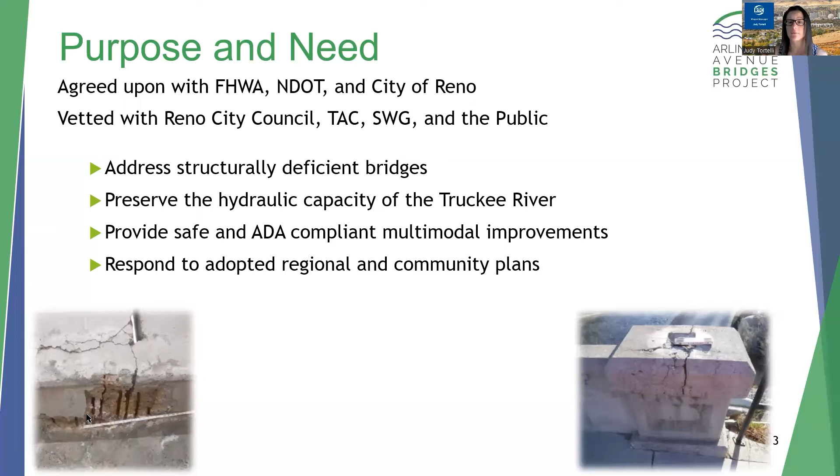I can't stress enough that we need your input. You can provide your feedback by taking our survey. The Build-A-Bridge tool displays the various aesthetic choices together in a photo simulation.

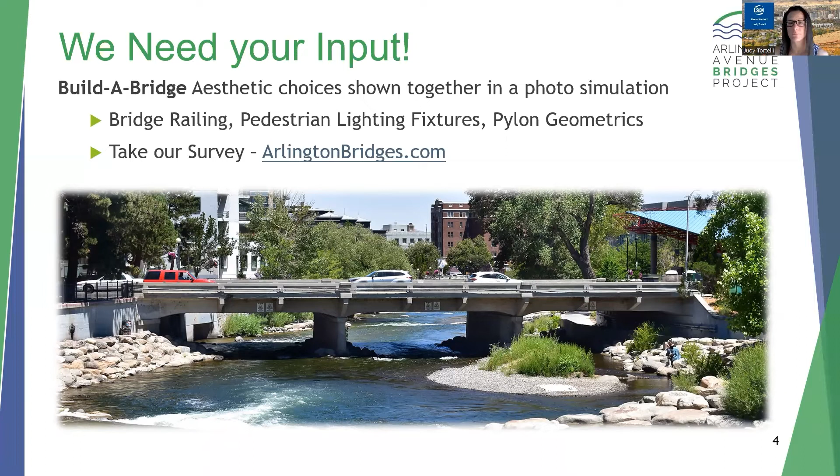Let's jump right into it. Based on design goals and elements, 3 bridge railing options were developed. All 3 railings are required to be vehicular rated, meaning crash resistant from vehicles, and must meet accessibility requirements for openings in the railings.

All 3 options have an overlook on both sides of the North Bridge. This is a place where pedestrians can view the Truckee River and surroundings, looking both east and west. The South Bridge will be designed using the same railing type as the North Bridge. Also note that these views do not include bridge lighting.

The 3 bridge railing options are option 1, here on the top, which is a Texas Department of Transportation vehicular rated design. The concrete railing would be used in both the straight and overlook railing sections.

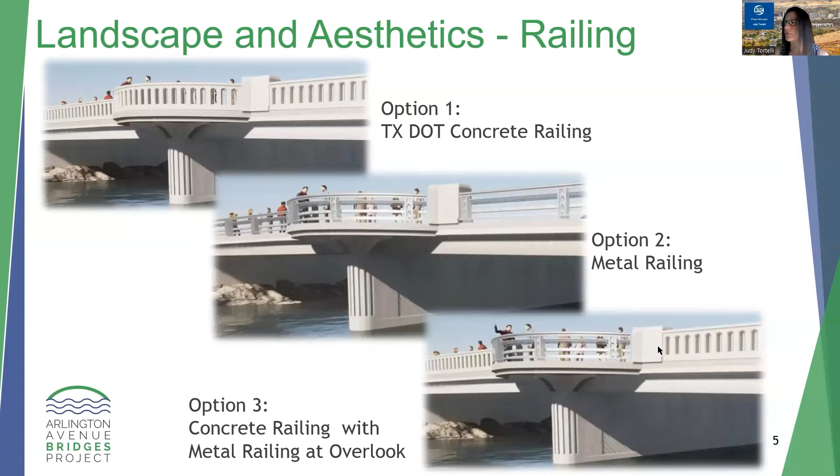Option 2, here in the middle, is a metal railing system that is more transparent, so viewers on the street and sidewalk can have more open views of the Truckee River and surroundings. Option 3, down here on the bottom, is a hybrid of options 1 and 2, with a metal railing system at the overlooks and concrete railing on the straight sections of the bridge.

Here is an overall view of option 1, photo simulated at the actual location. Its concrete railing system is based on a Texas Department of Transportation vehicular rated design.

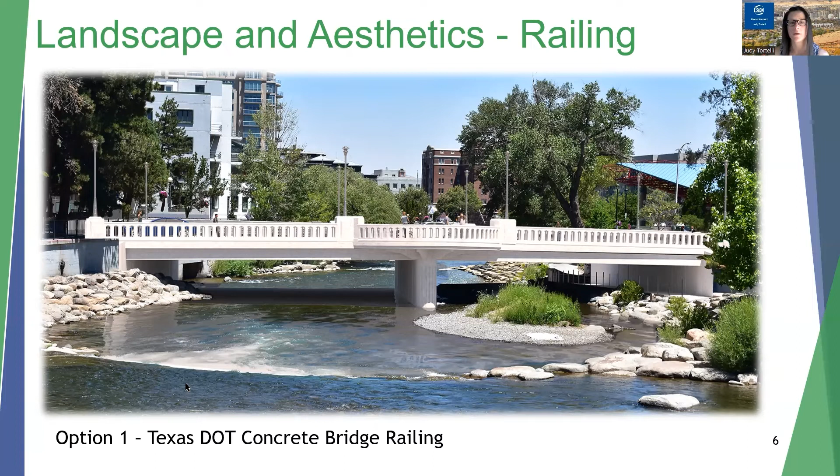And here is a photo simulation of option 2. You can see this one is a metal railing system that is more transparent, so viewers on the street and sidewalk can have more open views of the Truckee River and surroundings.

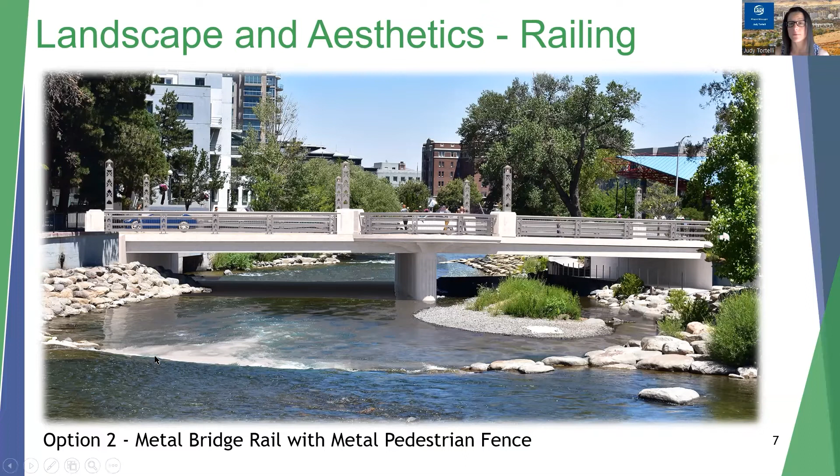And here's option 3. This one, like I said, is a hybrid of option 1 and 2 with the metal railing here at the overlook and then the concrete railing on the straight sections.

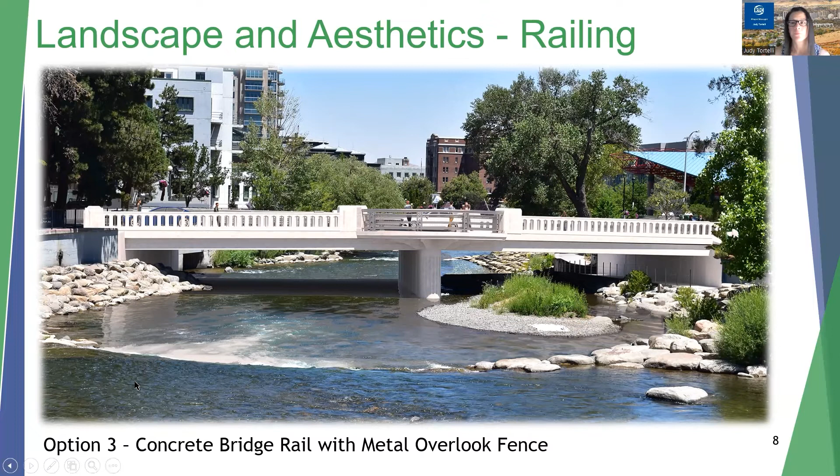Pedestrian-scaled lighting is planned for the bridges to illuminate the sidewalks, overlooks, and street. Two options for pedestrian lighting are shown, and one type will be chosen for the final design.

Option 1 is a pole with an LED post-top luminaire. This pole could be used with any bridge railing type: all concrete, metal, or concrete with metal overlook railings. The photo on the right shows several types of post-top lights.

The final choice of post-tops will be determined in the next phase of design with detailed lighting studies. Option 2 is a custom light column with a bridge rail motif, which could be used with a metal bridge railing type, or metal or concrete with metal overlook railing. The layered metal features in the column would also be used in the metal railing detailing.

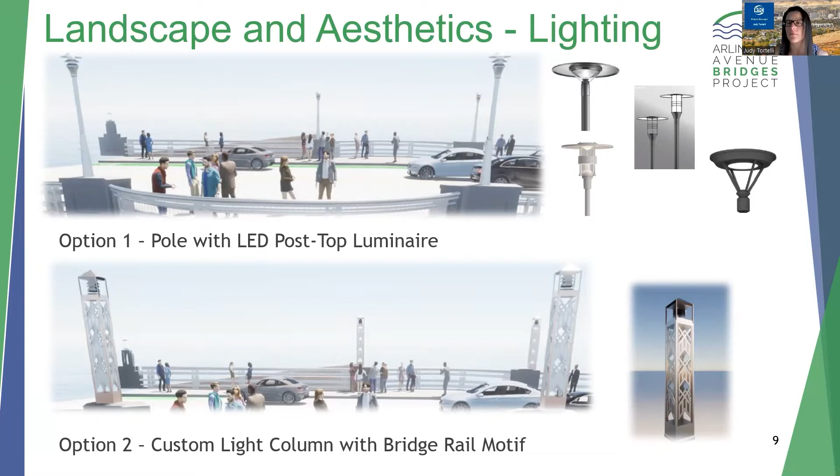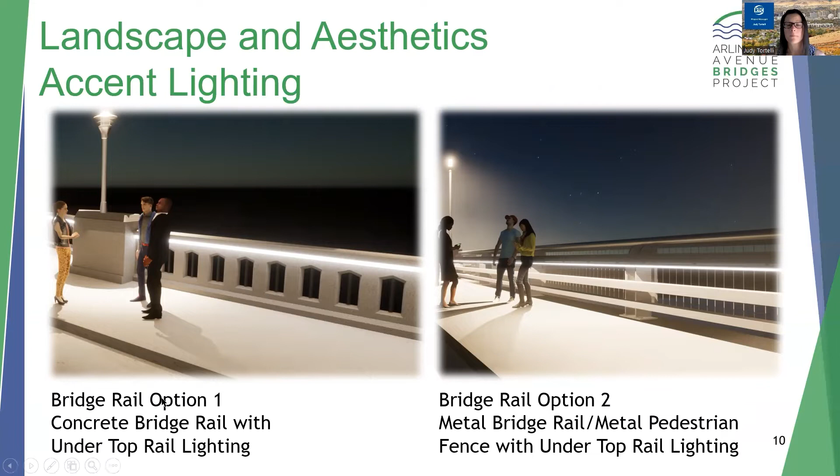Pylons will be placed at the ends of the bridges and at the midspan overlook on the North Bridge. Three pylon design group options are shown for consideration, and only one pylon group will be chosen for the final design.

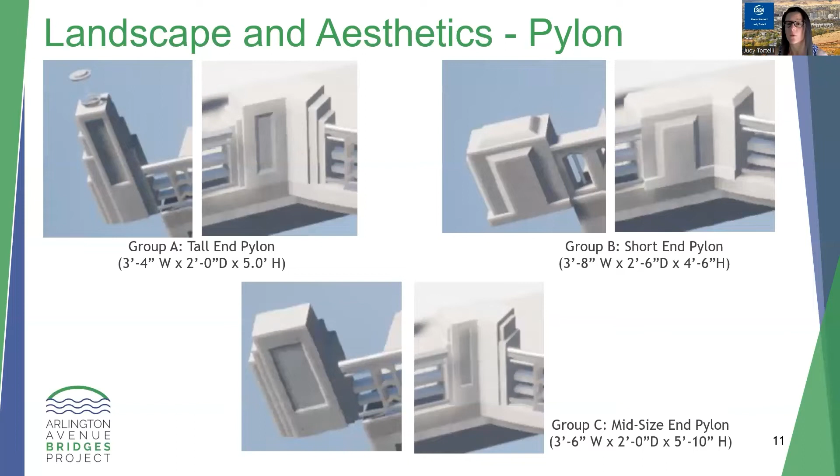The options include Group A, photos on the upper left, with a tall end pylon and a shorter midspan pylon with cascading sides. Group B, photos on the upper right, has a shorter end pylon and midspan pylons similar to those on the Virginia Street Bridge. Group C, photos on the bottom, has a mid-sized end pylon and mid pylons with cascading sides.

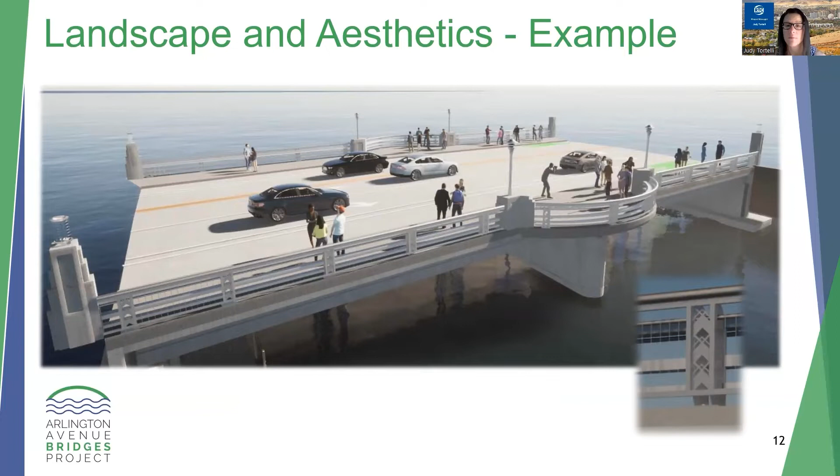Here is an example showing pylon group A placed on top of the North Bridge with an all-metal railing system. This shows the pole with LED post-top light at the midspan pilasters and a custom light at the end pylon. The photo on the bottom right is a blow-up showing the metal pedestrian fence, with vertical strips of metal spaced to meet pedestrian accessibility requirements.

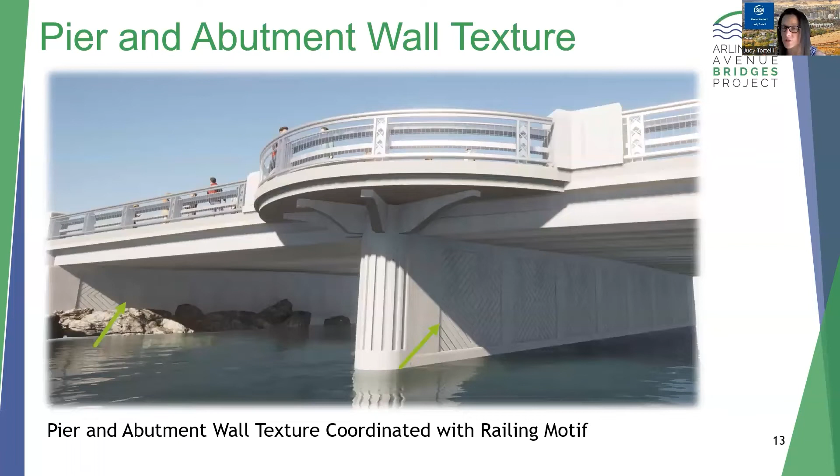This image highlights the abutment walls and the pier on the North Bridge, marked by the green arrows. As shown, they will have a texture. The pattern is designed to coordinate with the overall bridge design, and textured surfaces typically deter graffiti.

This figure shows the streetscape elements along Arlington Avenue over the Truckee River between Island Avenue and First Street, with North pointing to the right. Sidewalk areas between First Street and Island Avenue will be reconstructed as part of the project.

Elements included with this work are large canopy shade trees placed at approximately 30 feet on center spacing, between existing trees and between the bridges. These are indicated by the lighter green tree symbols, based on the City of Reno's goal to increase shade tree coverage, meet city code requirements, and reduce the urban heat island within the city limits.

Existing trees will be protected and maintained where possible. Several trees require removal because they are extremely close to either the sidewalk, abutment, or flood wall reconstruction areas. These trees will be replaced with shade trees.

Sidewalks are planned to have diagonal joint patterns and medium gray color concrete. The diagonal joint patterns are accents that complement the bridge railing designs. The sidewalks will be designed for a smooth transition from the street to the sidewalk and into the park, to maintain accessibility during special events.

The goal for the street and pedestrian lighting is to use pedestrian-scaled lights as much as possible to light sidewalks and the street. Lighting on the bridges can be provided by either the LED post-top luminaire, custom column light, and/or custom end pylon light combination. Taller street lights may also be required along the street. The lighting design will be finalized in the next phase of work.

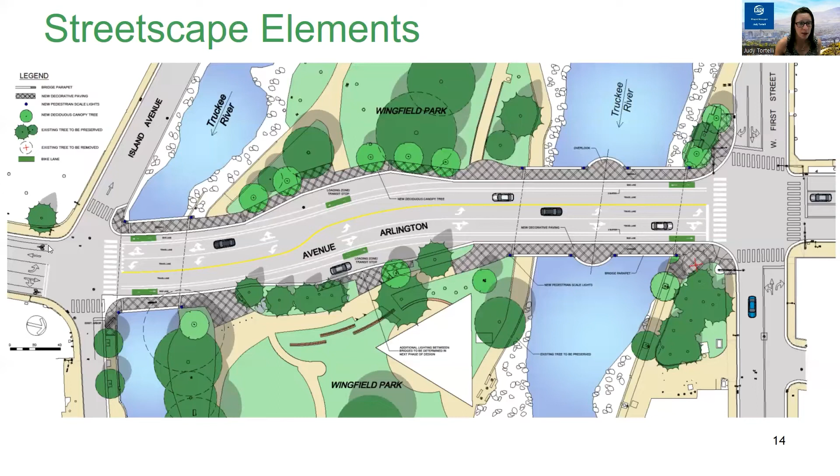Now I would like to move into discussing the impacts of construction. We anticipate having a contractor selected by August 2024. This September 30th date is important because that is the deadline for our grant fund obligation.

We can only work within the river during non-flood season, so we are limited to July 1st through October 31st. The team anticipates that the contractor will build the North Bridge first in 2025, then the South Bridge in 2026. We anticipate construction to be complete by the end of 2026.

I'm going to go over a construction limits map and also discuss the temporary Wingfield Park closure. The environmental team has been working hard to define the effects this project will have on Wingfield Park. Based on coordination with the City of Reno Parks Department, Wingfield Park and the Whitewater Park will be closed to public access during construction. This is a big impact because it will be closed for up to 2 years during the bridge replacement.

Serious consideration was given to keeping a portion of the park open for public access. However, public safety being the utmost priority, followed by a positive park user experience, led to the decision to temporarily close the park. I would like to highlight some of the key points that led to this decision.

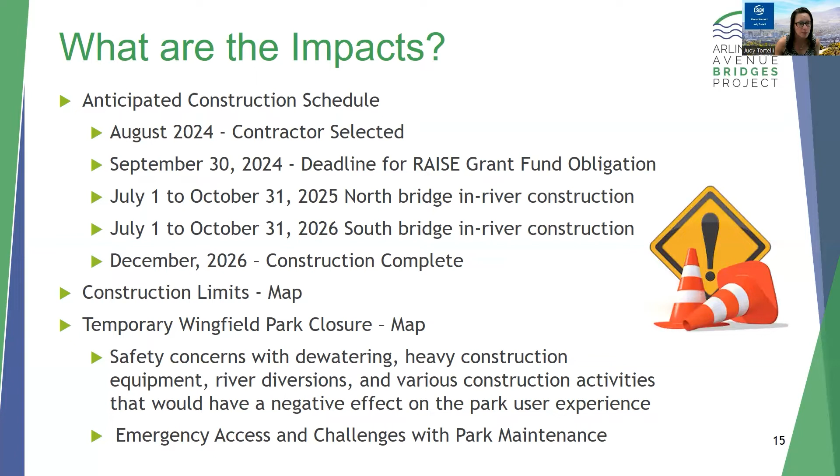Here is that construction limits map that I wanted to show you. This red dashed line here is our anticipated limits of construction. We are going to be digging some pretty big holes here at Island Avenue and First Street to construct our bridge abutments.

This area at Island Avenue is really tight, and we are anticipating that shoring will be required, so one-way access to Island Avenue can be maintained.

Some assumptions the design team discussed, based on constructability review of the 30% design submittal, included construction staging and what we anticipate the contractor to do. There's not a lot of room within this project area for the contractor to stage.

We anticipate the contractor will be using Arlington Avenue to stage equipment, this area here between the two bridges. One of the challenges that the contractor is going to have is that they have to build two bridges, the North Bridge and the South Bridge, all within one construction site.

Water from the river is going to have to be diverted to build these bridges, and dewatering to get our pier and abutments in will also have to happen. I would like to caution that this is all a guess of how the contractor will phase and build the project. We don't have a contractor on board yet, and once the project is awarded, this approach may change.

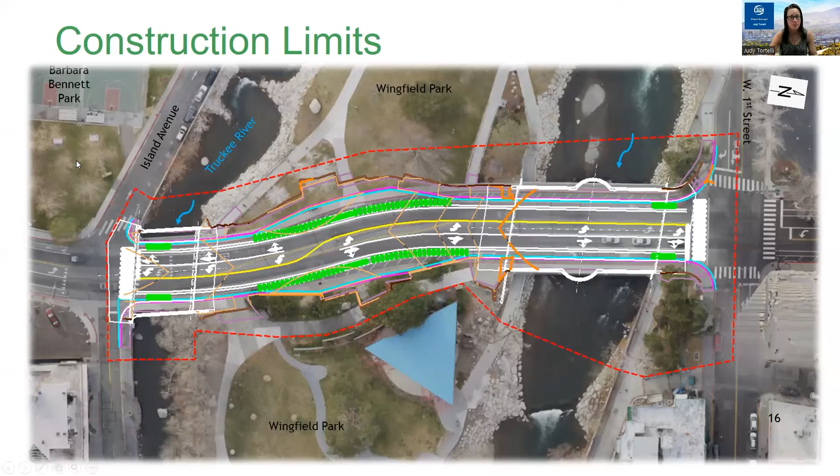As far as people floating within the river, the contractor will be providing upstream signage at key points. We're thinking right now those will be Mayberry Park, Crissy Caughlin Park, and Idlewild Park, letting people within the river know that the Truckee River is closed. Access to the Truckee River is closed at Wingfield Park.

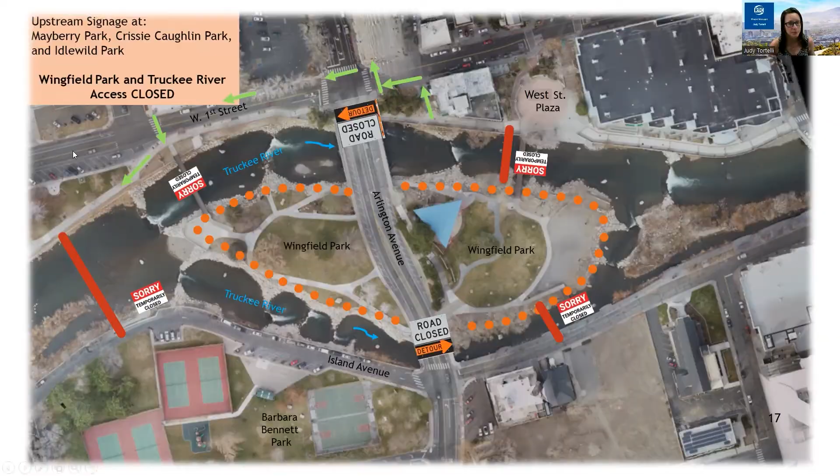Now I will move into a bit of project history and background information. Our first public informational meeting ran live earlier this year from March 14th through April 18th. With that meeting, RTC conducted a survey and received 163 responses and 8 email comments. I will touch on a few of the survey questions in the next few slides.

The team has been busy with a ton of meetings. Here I have summarized our outreach efforts with the stakeholder working groups developed earlier this year. Agency and utility coordination meetings focus on keeping members of the group informed on environmental issues and design decisions. These meetings have also helped engage the utility companies, so we get relocations and upgrades included early on as the design moves forward. Technical discussions, digging into the details of the design, are happening at our design review committee meetings.

Our aesthetic stakeholder working group has put a lot of time and effort into developing the aesthetic options that you will be voting on when you take our survey. I'm excited to see good attendance throughout this process and think the team has done a great job developing the design to a 30% stage. Later on in the presentation, I will highlight some of the key decisions these groups have made on compiling all of the input received.

Materials from these meetings is posted on our website and available for review. We also have the survey results and responses to comments posted on the website from our first public meeting.

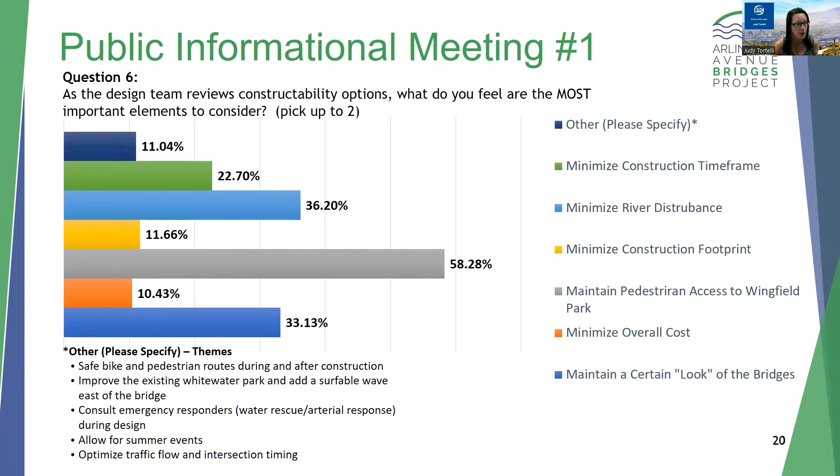Micromobility discussions keyed in on several items, including special event access and utilizing Arlington Avenue as a plaza, tripping hazards with various curb height elevations, and conflicts between walking pedestrians, bikers, scooters, and transit riders. The overall geometry and pedestrian-vehicle separation was also considered. Based on these competing interests, crash data, posted speed limit, and continuity of existing bike lane infrastructure, the Aesthetic Stakeholder Working Group, Design Team, and City of Reno have recommended buffered bike lanes.

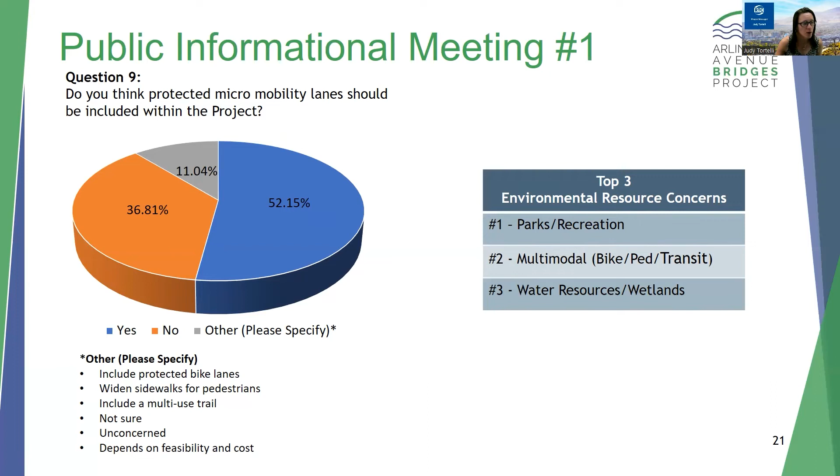It is important to note also that Parks and Recreation was ranked as #1 as an environmental resource concern. The park is heavily used, and people want to be able to continue to enjoy this area.

Now on to some of those key decisions. For our bridge type, we will be building a single pier for the North Bridge and a clear span for the South Bridge. Both bridges will be precast bridge girders.

The pedestrian path under the South Bridge was determined not feasible, mainly due to safety concerns and the fact that it was going to end up looking like a tunnel under the roadway.

We also reviewed roadway geometry and determined that wider sidewalks were needed, and overlooks on the North Bridge would be nice to have. We looked at adjusting lane configurations to accommodate all modes of transportation, improved pedestrian circulation, and proposed enhanced pedestrian crossings at Island Avenue.

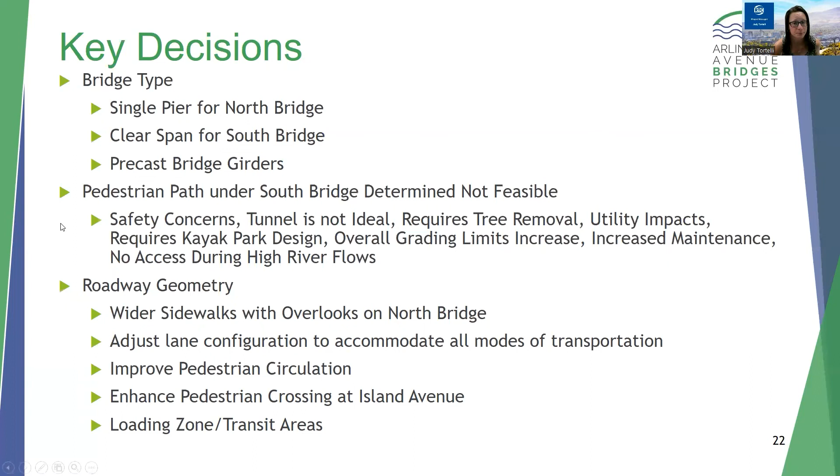Landscape and aesthetic design goals were developed during the earlier feasibility study phase to guide the development of the bridge and streetscape design. These were developed through stakeholder and public input. The goals are to create a cohesive design language, enhance the pedestrian experience, provide contextual and historical relevance, and look at innovation and sustainability.

A few things I wanted to highlight under contextual and historical relevance: a big thing we heard from the public and stakeholders was that we should leave the Virginia Street Bridge to be the landmark bridge of the area, with others as focal bridges.

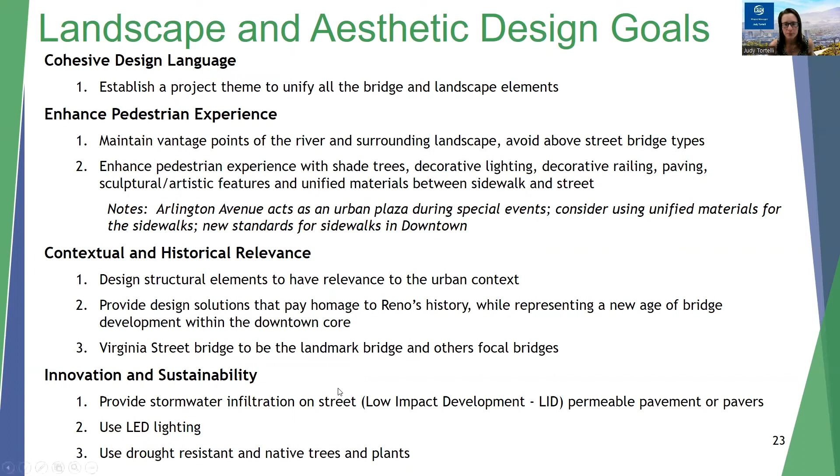Building upon the landscape and aesthetic design goals, the elements of the bridge and streetscape design were also described. Again, these were developed through stakeholder and public survey input. The landscape and aesthetic elements are: use modern design elements with a melding of the old and the new.

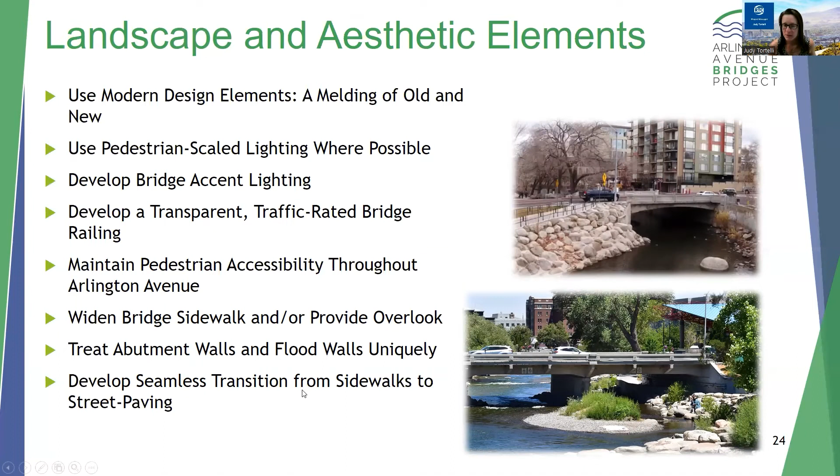Use pedestrian-scaled lighting where possible, develop bridge accent lighting, develop a transparent traffic-rated bridge railing, maintain pedestrian accessibility throughout Arlington Avenue, widen bridge sidewalks and/or provide overlooks, treat abutment walls and flood walls uniquely, and develop seamless transitions from sidewalks to street paving.

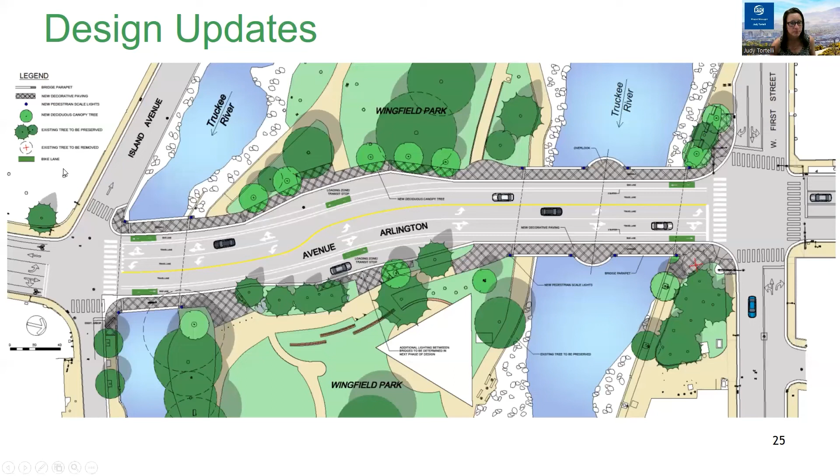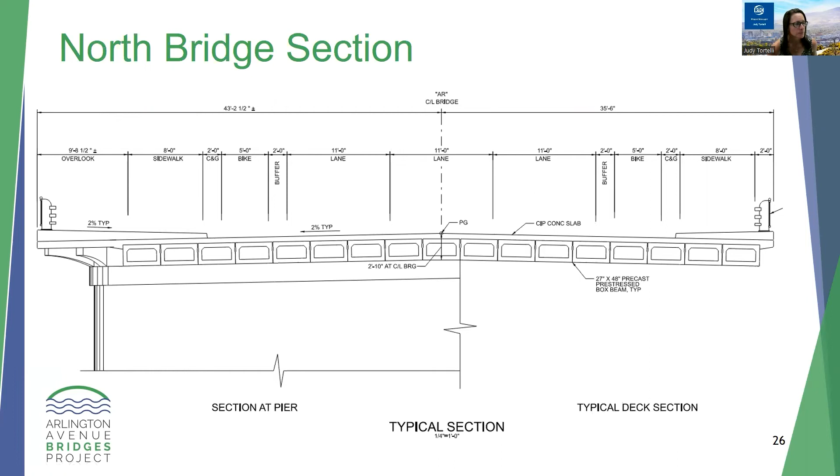So here's our North Bridge section. Again, our minimum sidewalk width is 8 feet. We'll be carrying through those bike lanes, a 5-foot bike lane with a 2-foot buffer. We have our 3 11-foot lanes through the corridor, and then again the bike lane buffer, and then our sidewalk on the other side.

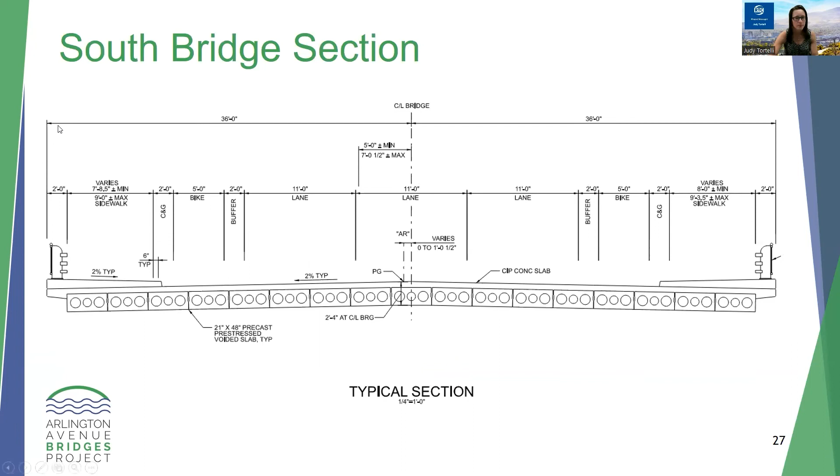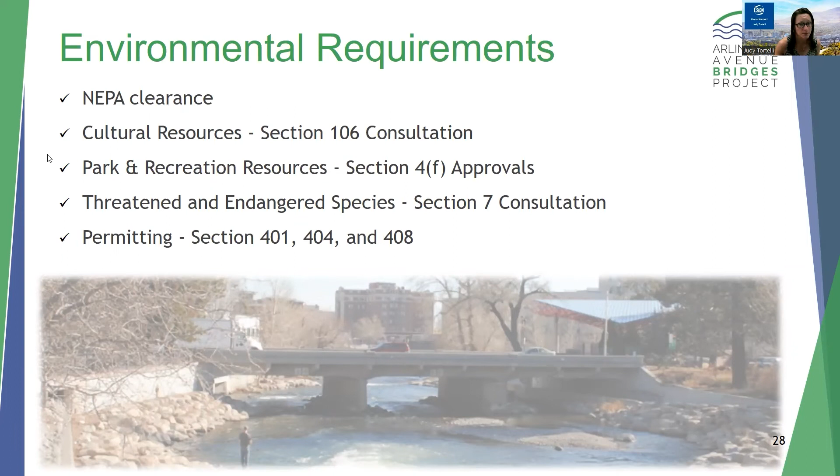Because we received federal funding for this project, we are required to comply with the National Environmental Policy Act, referred to as NEPA. NEPA is the framework for environmental planning and decision-making by federal agencies. The lead federal agency overseeing this project is the Federal Highway Administration, or FHWA. FHWA determines what type of environmental study is needed to comply with NEPA. It is anticipated that a categorical exclusion will be needed for this project.

As part of this process, we will conduct analyses of how the project would affect various community and natural resources in the vicinity. These analyses will be documented in technical reports prepared this fall. We anticipate NEPA clearance from FHWA in spring 2023. I'll review a few key topic areas that require approvals from other state agencies.

First, let's talk about cultural resources, which includes historic resources, archaeological resources, and tribal resources. Resources that are listed or eligible for listing on the National Register of Historic Places are subject to Section 106 of the National Historic Preservation Act.

To comply with this federal regulation, we consult with the State Historic Preservation Officer, referred to as SHPO, Native American tribes, and other participating parties such as City of Reno. The intent is to identify and consider project effects on significant cultural resources and seek ways to avoid, minimize, or mitigate any adverse effects. We started this process during the feasibility study and are continuing to coordinate with consulting parties to establish the area of potential effects and prepare an architectural history survey report. Ultimately, we will prepare an effects determination for significant resources and seek concurrence from the consulting parties.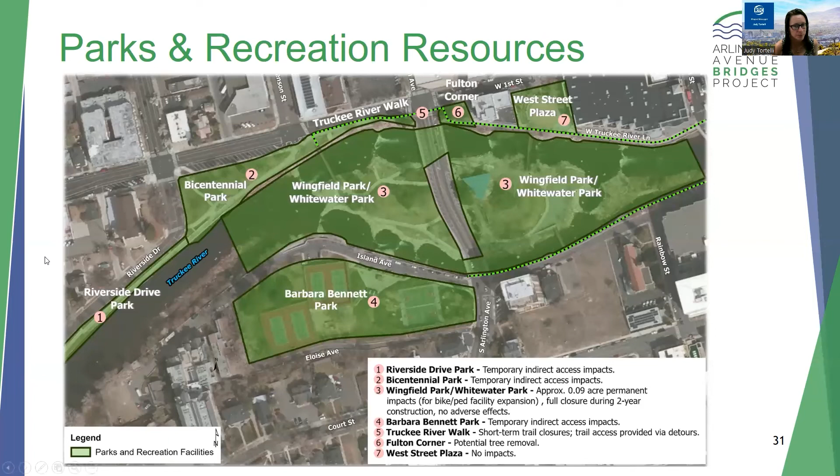A federal law that we comply with regarding park and recreational resources is Section 4F of the Department of Transportation Act. We are coordinating with the City of Reno on how best to protect the 7 significant recreation resources they own and manage in the project area.

It is anticipated that the RTC will request the FHWA to determine that the effects of the project on Wingfield Park, including the Whitewater Park, is a de minimis impact. A de minimis impact finding may be made if the project does not adversely affect the features, attributes, or activities qualifying the property for protection under Section 4F.

We must also have an agreement from the City of Reno and provide an opportunity for public input. For more information on this regulation, please visit the website listed here. More details regarding impacts to Wingfield Park, including the Whitewater Park, will be available on the website at arlingtonbridges.com.

Another federal law that we are complying with on this project is the Endangered Species Act, which is administered by the U.S. Fish and Wildlife Service. We are preparing a biological assessment to evaluate potential impacts to protected species, particularly protected fish species. One step we will likely take to minimize impact to these species is to conduct in-water work between July and November to avoid spawning periods. Other necessary measures will be established through consultation with the U.S. Fish and Wildlife Service.

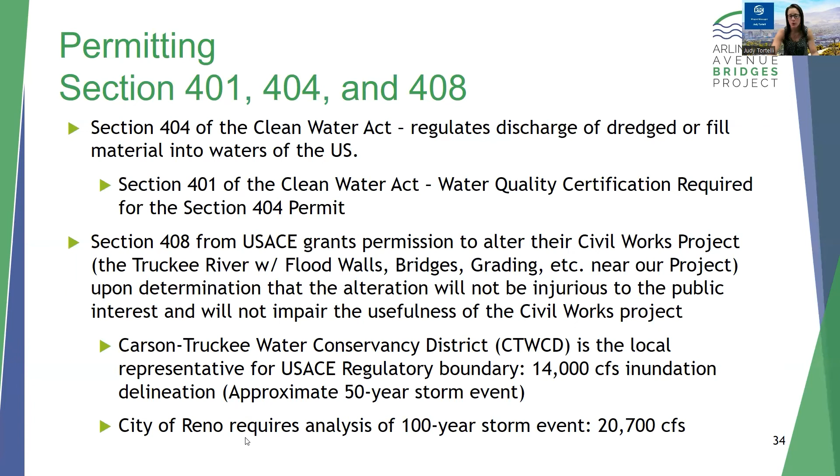Currently, there is no existing freeboard at the bridges during major flood events. Freeboard is the distance between the high water line and the bottom of the bridge deck. The design criteria requires no increase in the water surface elevation to ensure any flooding is constrained to the current inundation limits. The elevation at the adjacent Island Avenue and First Street intersections, combined with multiple nearby buildings, prevent the ability to raise the bridge profiles.

The hydraulic capacity in the north channel will be slightly improved by the use of a single pier compared to the two piers of the existing bridge. Design of the bridge deck thickness will be optimized to maximize the available area for hydraulic flows under the bridges.

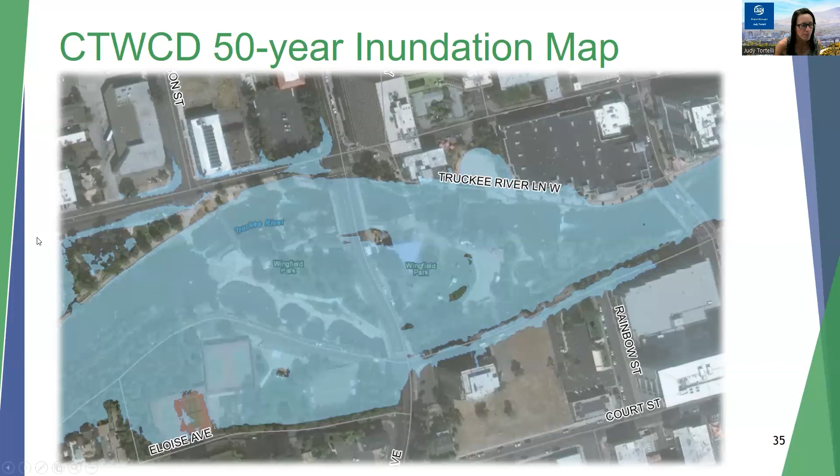In addition to the 50-year storm event, the City of Reno requires a 100-year storm event, a flow of 20,700 cubic feet per second, also be analyzed. The Truckee River Flood Management Authority, also referred to as TRFMA, maintains an extensive and comprehensive hydraulic model for the 100-year flood event. The inundation limits for the 100-year storm event are shown here.

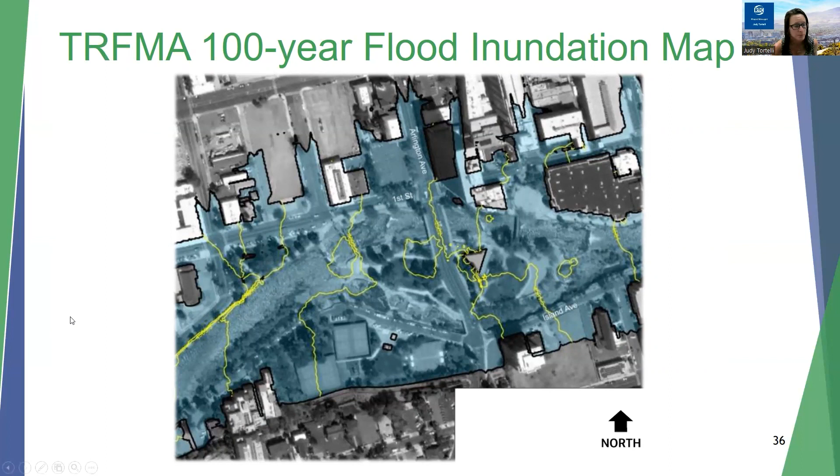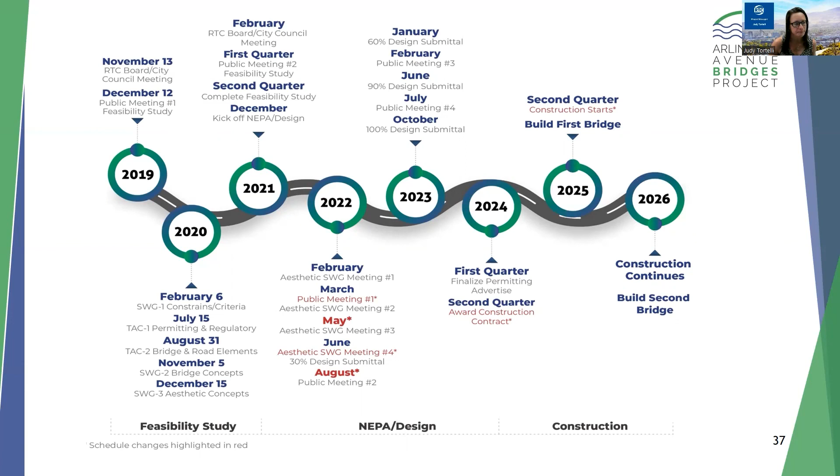Want to briefly touch on our next steps. There are some upcoming opportunities for you to see how design is progressing. At our third public informational meeting, we will present the design and show you what the final aesthetic package looks like. I'm anticipating having a fourth public meeting, but think I will move it closer to construction. The intent of that meeting was to notify the public of what construction is going to look like.

We won't award the construction contract until fall of 2024. I think it will be best to have our fourth public meeting after we have a contractor on board, because then we will really know what construction is going to look like. The design and environmental team will continue moving forward to 60% design. We need to hit utility coordination hard, finalize our lighting analysis, do the bridge design, finalize the aesthetics based on your input, finish environmental technical memos, and push hard to get our permits reviewed as quickly as possible.